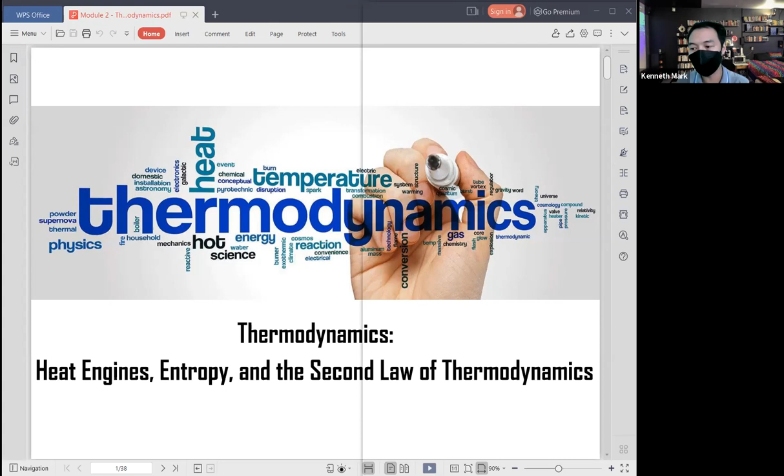Okay. So today we will be discussing the second module or second topic for this subject. So we have the thermodynamics, the heat engines, entropy, and the second law of thermodynamics.

Okay, so for the introduction, the first law of thermodynamics, which we studied, is a statement of conservation of energy. So this law states that a change in internal energy in a system can occur as a result of energy transfer by heat, by work, or by both. So only certain types of energy transformation and energy transfer processes, no? So only certain types of energy conversion and energy transfer processes actually take place in nature, however.

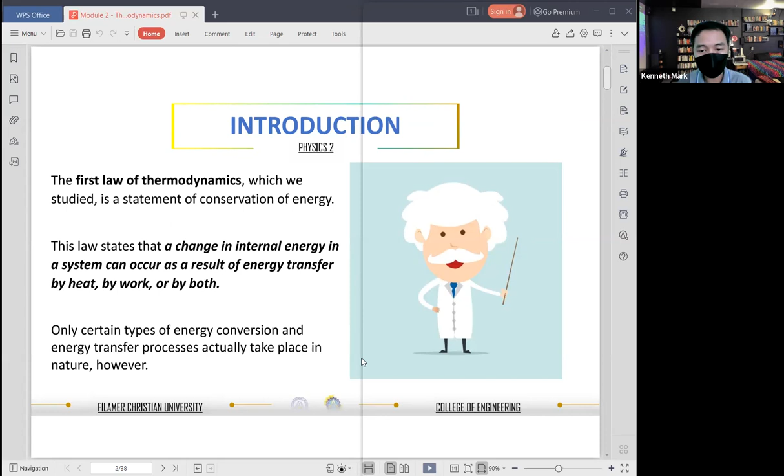So the second law of thermodynamics, which is the major topic in this module, establishes which processes do and do not occur. So we have here the following examples of processes that do not violate the first law of thermodynamics if they proceed in either direction, but are observed in reality to proceed in only one direction. So meaning hindi siya vice versa.

No? So for example, we have here, when two objects at different temperatures are placed in thermal contact with each other, the net transfer of energy by heat is always from the warmer object. Okay, so from warmer object siya to the colder object and never from the cooler to the warmer.

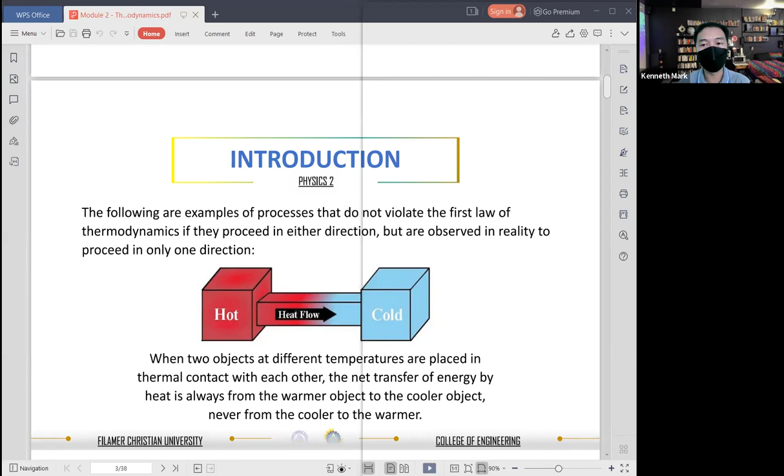Then next we have a second example, which is a rubber ball dropped to the ground. So it bounces several times and eventually comes to rest. But a ball lying on the ground never gathers internal energy from the ground and begins bouncing on its own. So wala siya ga kuha sa energy mismo.

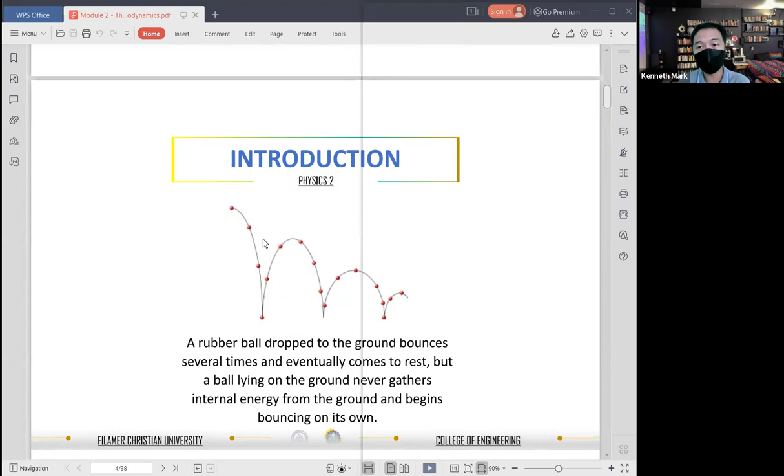So all these processes are irreversible. That is, they are processes that occur naturally in one direction only. So meaning no irreversible process has ever been observed to run backward. So if it were to do so, then it would violate the second law of thermodynamics.

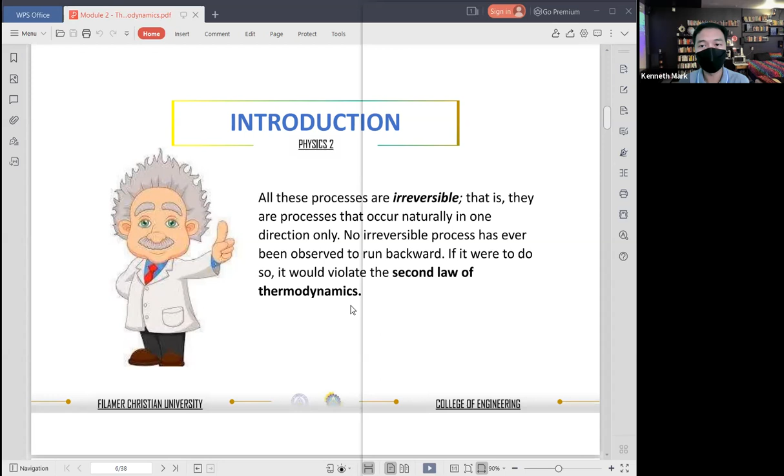Next, we have the heat engine. So a heat engine is a device that takes in energy by heat and, operating in a cyclic process, expels a fraction of that energy by means of work. Syempre. So for instance, in a typical process by which a power plant produces electricity, a fuel such as coal is burned, no?

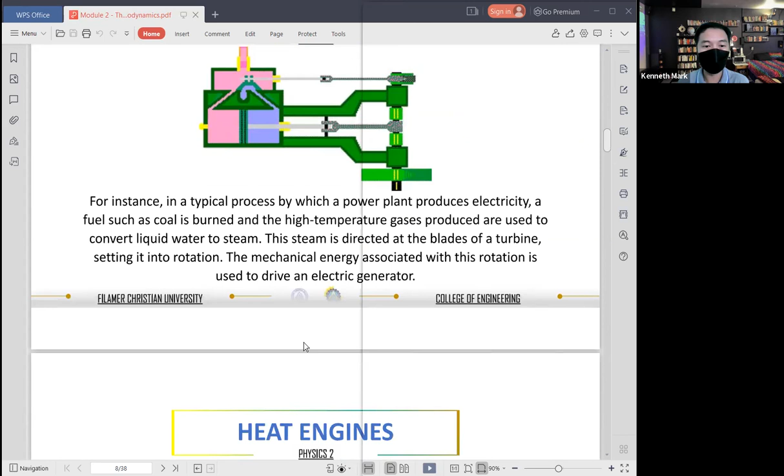Yan. So another device that can be modeled as a heat engine is the internal combustion engine in an automobile. Yan. Sa mga salakyan, ito. So this device uses energy from a burning fuel to perform work on pistons that results in the motion of the automobile. Yan.

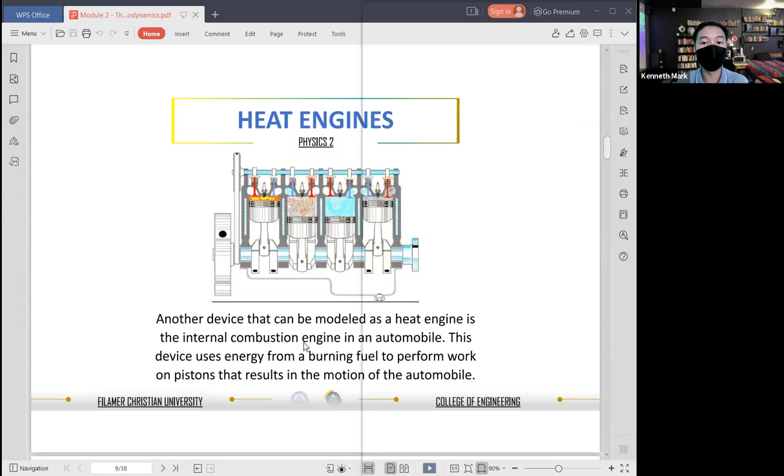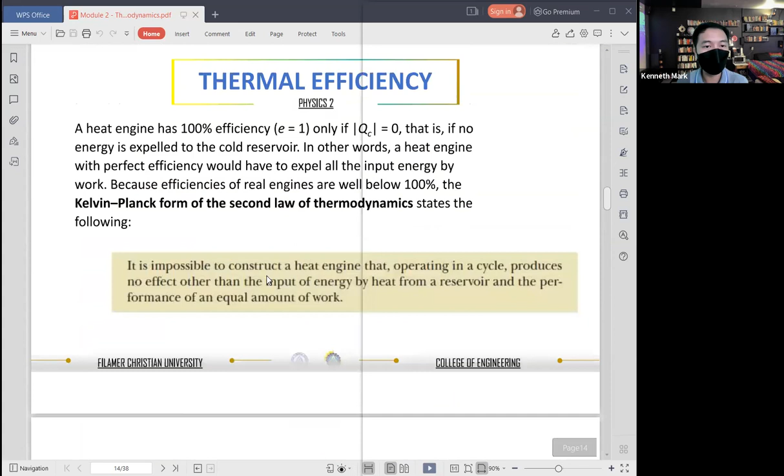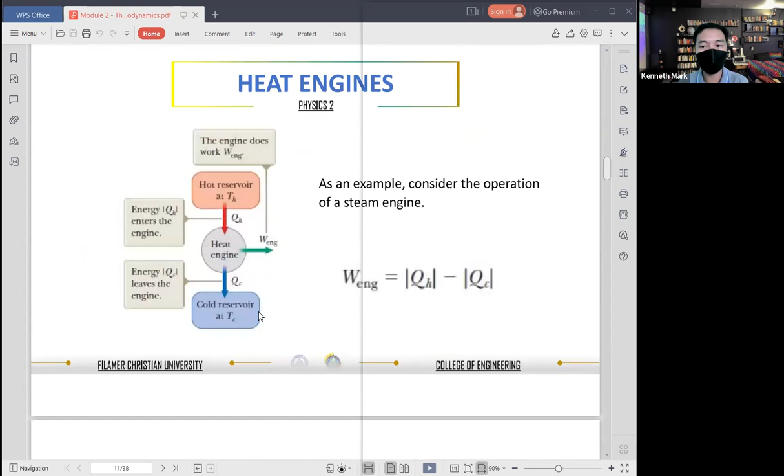Okay, so let's review that figure. Let's review this figure. So think about the energy going into the engine from the hot reservoir and splitting, with part coming out by work and part by heat into the cold reservoir, meaning there are two outputs. So in our sample problem, it involves evaluation of the quantities from the equations introduced in this section, so we categorize it as a substitution problem. And we already have the equation that we will use.

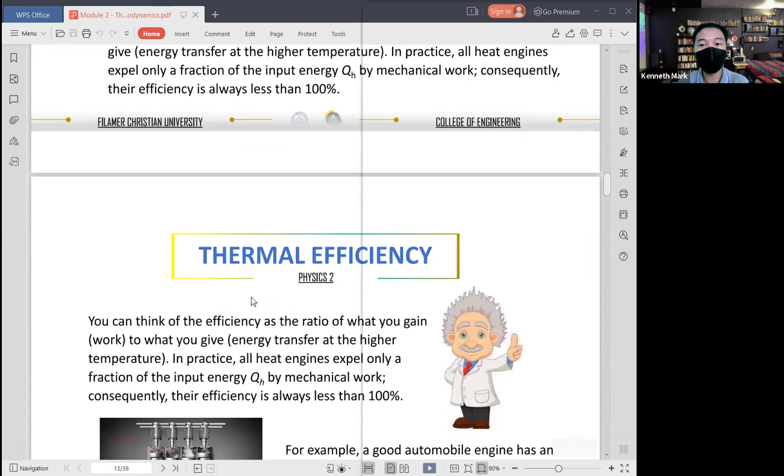Okay, so we already have the given. And that is 1 minus Q sub C over Q sub H. So our Q sub C, this is our problem. Our Q sub C is 1.5 times 10 raised to 3, this is the exhaust going to the cold reservoir. And then our heat, Q sub H, that is 2 times 10 raised to 3 joules, this is coming from the hot reservoir.

Or that is 0.25, or that is 25%. So meaning the efficiency of the engine from this problem is 25%.

Then the other problem or follow-up question would be: how much work does this engine do in one cycle? So to find the work being done by the engine, we just subtract. That is heat minus the cold, or Q sub H minus Q sub C. That is 2 times 10 raised to 3 minus 1.5 times 10 raised to 3 joules, or that is 5 times 10 raised to 2 joules. So this is the work being done by the engine. We just take the difference between the input and the output energies.

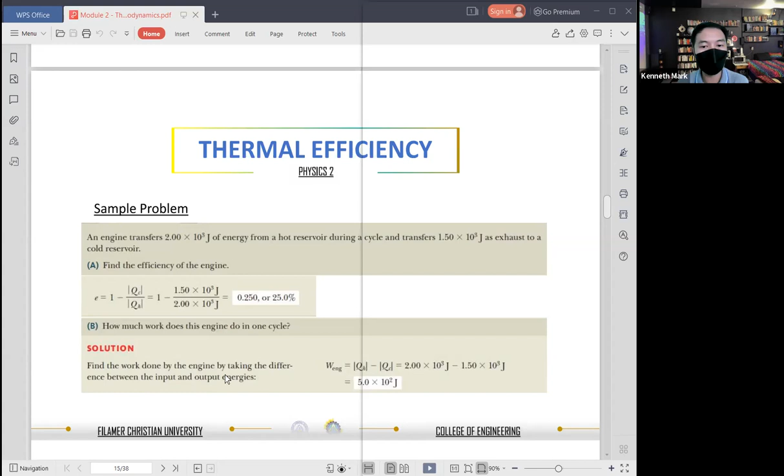So questions with regards to this problem, we can review that one later on.

So another topic, we have the heat pumps and refrigerators. In a heat engine, the direction of energy transfer is from hot reservoir to the cold reservoir. This is the heat engine, which is the natural direction, this is the correct process, this is its natural process. So the role of the heat engine is to process the energy from the hot reservoir so as to do useful work.

So what if we wanted to transfer energy from cold reservoir to hot reservoir? Because that is not the natural direction of energy transfer, we must put some energy into a device to be successful. And devices that perform these tasks are what we call heat pumps and refrigerators.

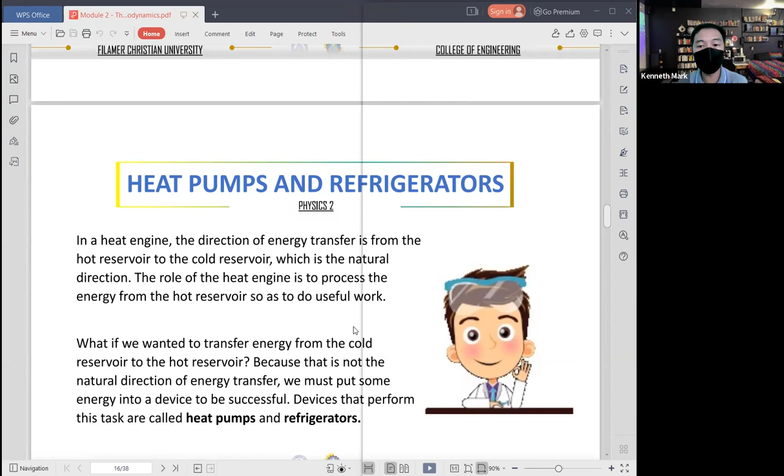So for example, homes in summer, like our houses. So what do we do here? We use, for example, an air conditioner.

So homes in summer are cooled using heat pumps called air conditioners. The air conditioner transfers energy from the cool room in the home to the warm outside. So haven't you noticed that the exposed part, the back of the air conditioner, is exposed to heat. The side of the ref, the back of our ref, is hot.

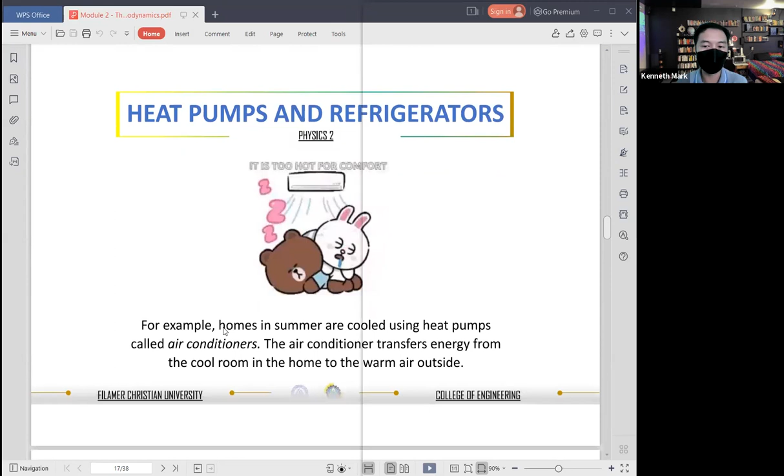So in a refrigerator or a heat pump, the engine takes in energy, that is Q sub C, from a cold reservoir, and expels energy to a hot reservoir, that is Q sub H. Which can be accomplished only if work is done on the engine. So the work is done on the engine, not work is done by the engine.

So based on the first law, the energy transferred to the hot reservoir should equal the sum of the work done and the energy taken in from the cold reservoir, because the first law of thermodynamics is conservation of energy. So therefore, the refrigerator or the heat pump transfers energy from a colder body.

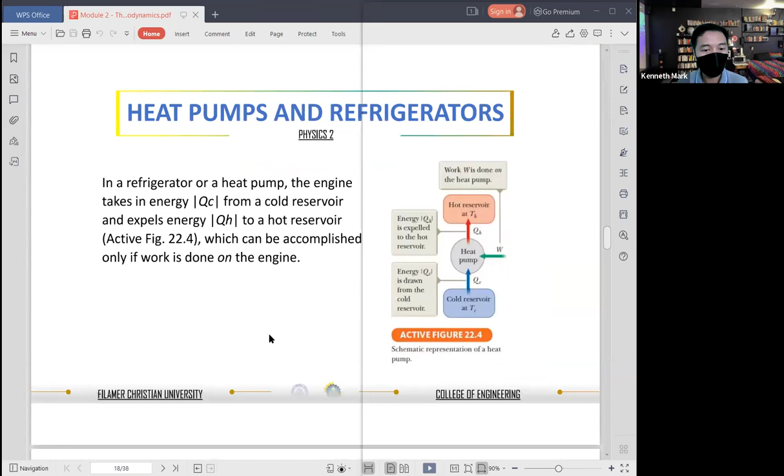So it's a colder body, for example the contents of a kitchen refrigerator, or the winter air outside a building, to a hotter body, that is the air in the kitchen or in the room in the building.

In practice, it is desirable to carry out this process with minimum work. If the process could be accomplished without doing any work, the refrigerator or heat pump would be perfect. But the existence of such a device would be in violation of the second law of thermodynamics, in the form of Clausius' statement, which states that it is impossible to construct a cyclical machine whose sole effect is to transfer energy continuously by heat from one object to another object at a higher temperature without the input of energy by work.

So in simpler terms, energy does not transfer spontaneously by heat from a cold object to a hot object.

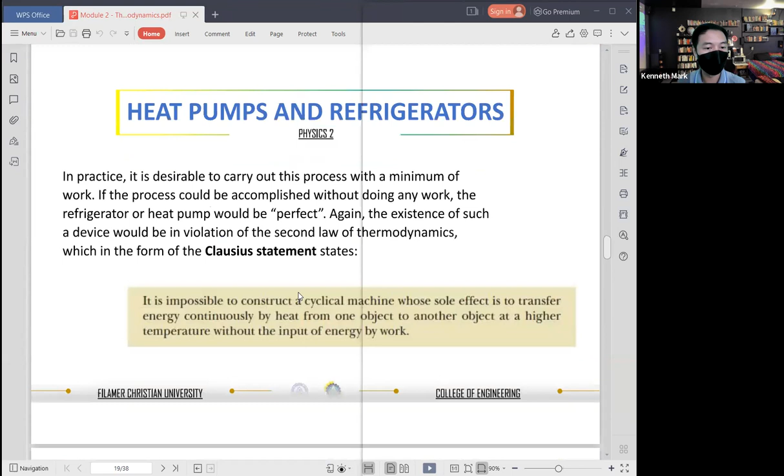Tingnan natin. Work input is required to run a refrigerator, of course.

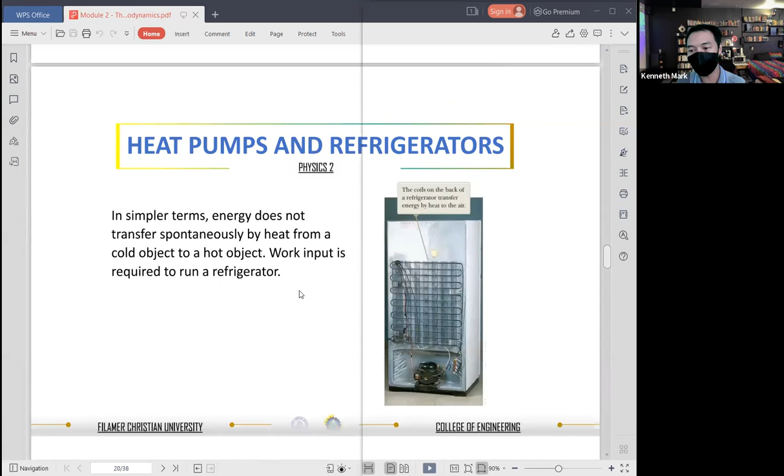Meron tayong tinatawag na the effectiveness of a heat pump. So what is this? It is described in terms of a number called the coefficient of performance. Ito yung effectiveness of a heat pump. So meron tayong COP na tinatawag.

This is similar to the thermal efficiency for the heat engine in that it is a ratio of what you gain, meaning the energy you transferred to or from a reservoir, to what you give, that is your work input. So for a heat pump operating in the cooling mode, what you gain is energy removed from the cold reservoir. So the most effective refrigerator or air conditioner is one that removes the greatest amount of energy from the cold reservoir in exchange for the least amount of work.

Ngayon meron ng mga inverter. Ito yung pinaka inverter type na refrigerator and inverter type na air conditioner, wherein mababa lang yung consume ng kuryente, mababa lang yung energy consumption niya. Pero may kamahalan nga lang sa parts. Pag nasira, parang equivalent ay parang isang bagong refrigerator, o isang equivalent niya ng piyesa na sira is parang bumili ka na rin ng bago. So take note of our formula here.

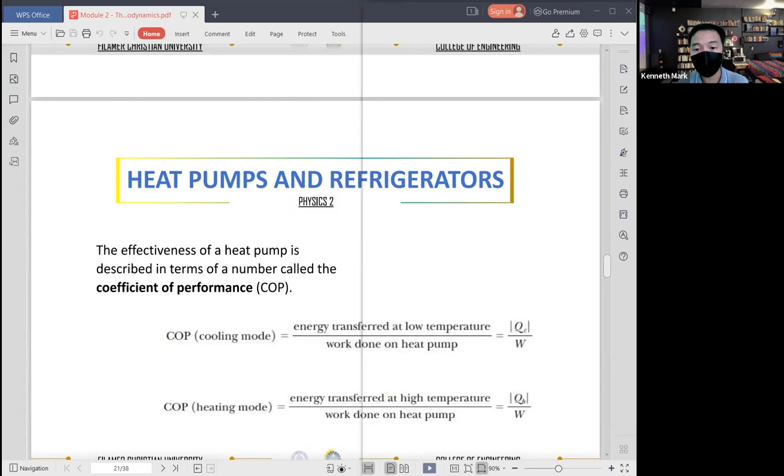Okay, so we have here some example problem. Let's take a look. A certain refrigerator has a COP of 5. So ano ba to? Heat ba to or cooling ba to? Heating ba to or cool? So when the refrigerator is running, its power input is 500 watts.

Meron tayong power na given. And a sample of water of mass, let's say 500 grams, with a temperature of 20 degrees Celsius, is placed in the freezer compartment. So tanong dito is, how long does it take to freeze the water to ice, to 0 degrees Celsius? Ilang oras ba bago maging ice o bago maging yelo yung tubig? Assume all other parts of the refrigerator stays at the same temperature and there is no leakage of energy from the exterior, meaning wala tayong singaw. So the operations of the refrigerator results only in energy being extracted from the water.

Tingnan natin. Tingnan natin anong nangyari. So we use the equation to relate the work, that is W being done on the heat pump, to the energy, that is Q sub C.

Ito yung papuntang cold, or that is the energy extracted from the water. So that is your change in time would be equal to Q sub C over the...

That is Q sub C, that must be extracted from the water of a mass. So we have...

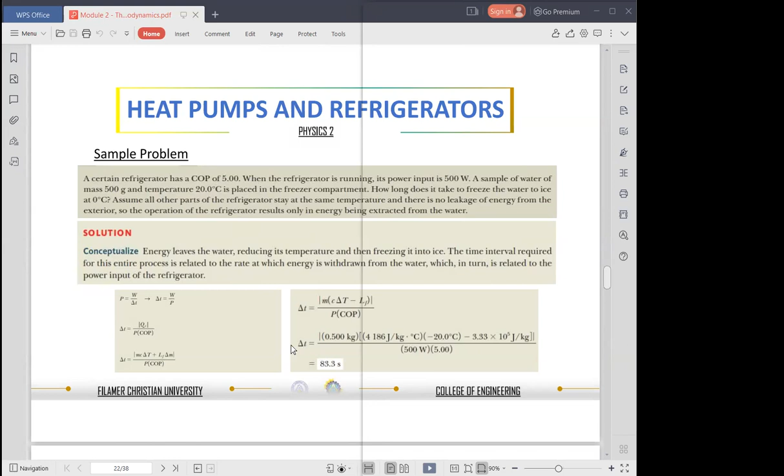About the answer, degrees. So that is your... 0.5 kilograms times ano yan? Times 4,186 joules per kilogram. Ano to? Ito yung C natin, or that is the specific heat of water. Check niyo na lang sa previous module natin.

And you have your change in temperature, that is 0 minus 20 degrees Celsius, or negative 20 degrees Celsius. Then subtract natin lahat sa 3.33 times 10 raised to 5. Ano tong 3.33 times 10 raised to 5? Saan to galing? Ito yung latent heat of fusion ng ano natin, yung ng water natin. Then all over by, of course, your power that is given, 500 watts, then multiplied by your COP, that is 5. So therefore, it can turn to ice by 83.3 seconds.

Okay. So the time interval for the water to freeze in a refrigerator is much longer than 83.3 seconds, which suggests that the assumptions of our model are not valid. So meaning only a small part of the energy extracted from the refrigerator interior in a given time interval comes from the water. That is, energy must also be extracted from the container in which the water is placed. Of course, syempre naggamit ka sang imong suludlan sa imong tubig, so i-compute pa na siya.

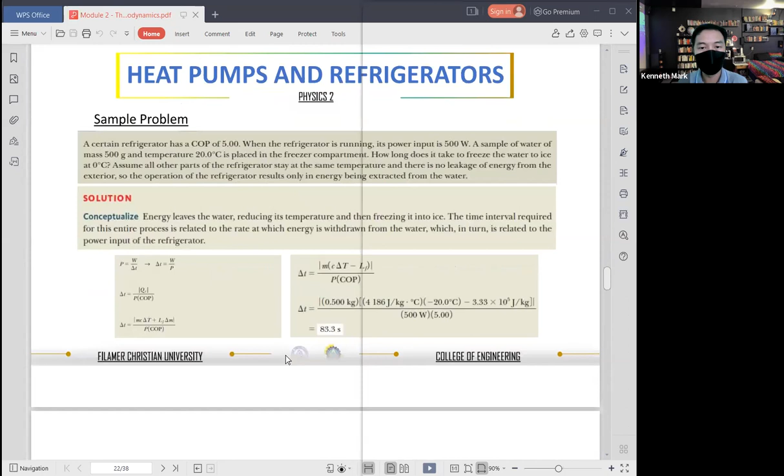Next, so we have the reversible and the irreversible process. Okay? Ito yung second law of thermodynamics, yung irreversible, di ba? So in a reversible process, the system undergoing the process can be returned to its initial condition. Tama ba? Is an equilibrium. So it's what we call irreversible. Okay, yun yung mga natural processes.

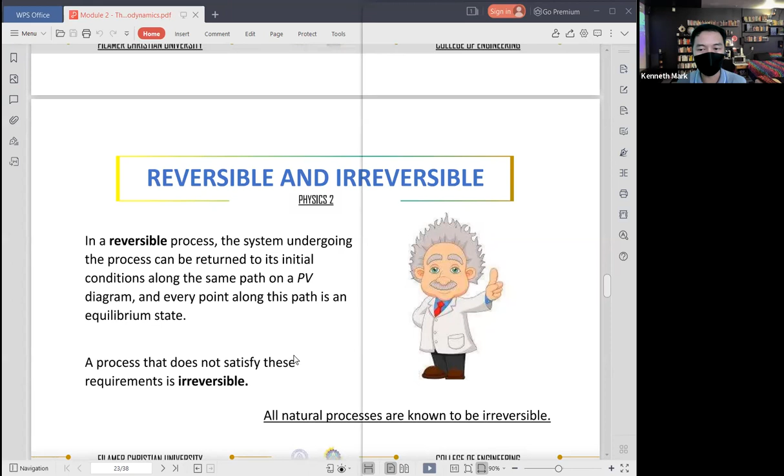So when the membrane is punctured, the gas expands freely into the vacuum, syempre. As a result of the puncture, the system has changed because it occupies a greater volume after the expansion. And because the gas does not exert a force through a displacement, wala tayong force dyan, it does no work on the surroundings as it expands. And then in addition, there's no energy.

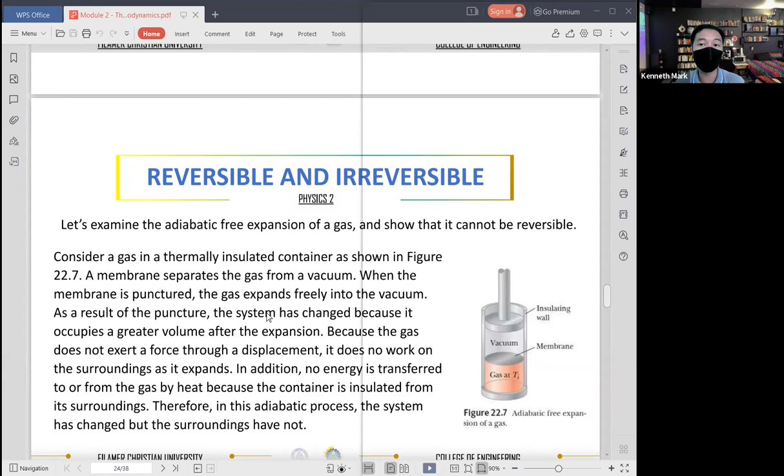Ay, na-late na pala.

Tama. So although all real processes are irreversible, some are almost reversible. Pwede naman, nasa first law of thermodynamics sila. So the process can be approximated as being reversible. So how? Suppose a gas is compressed isothermally in a piston-cylinder arrangement, and the gas is in constant.

Okay. Meron ba dyan? Example. Wala tayong example. Sige, natin to.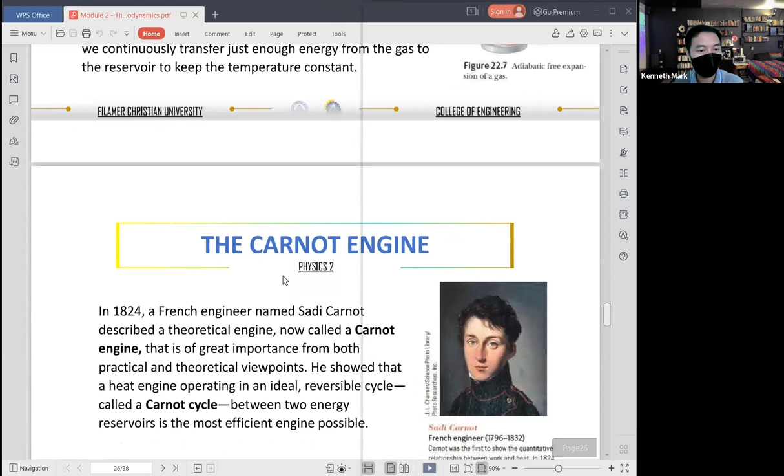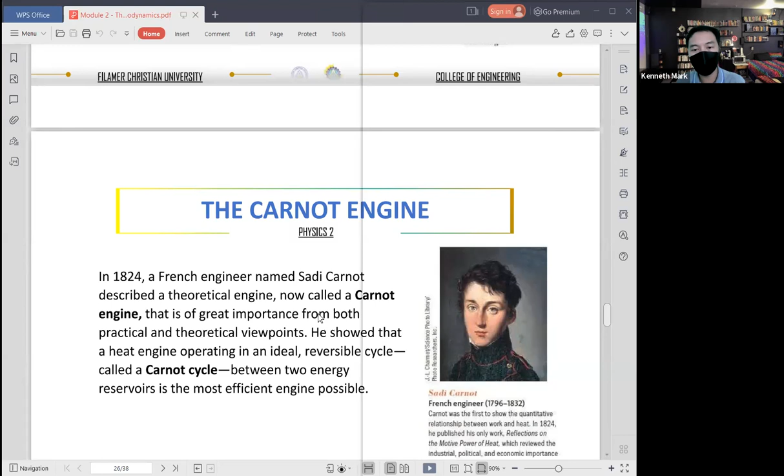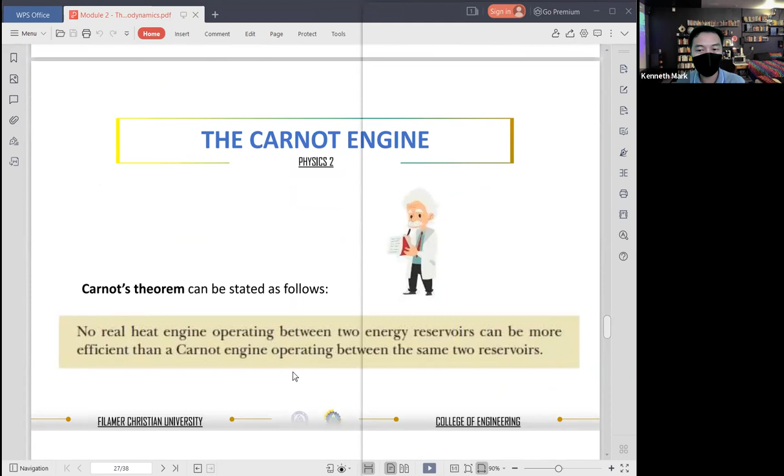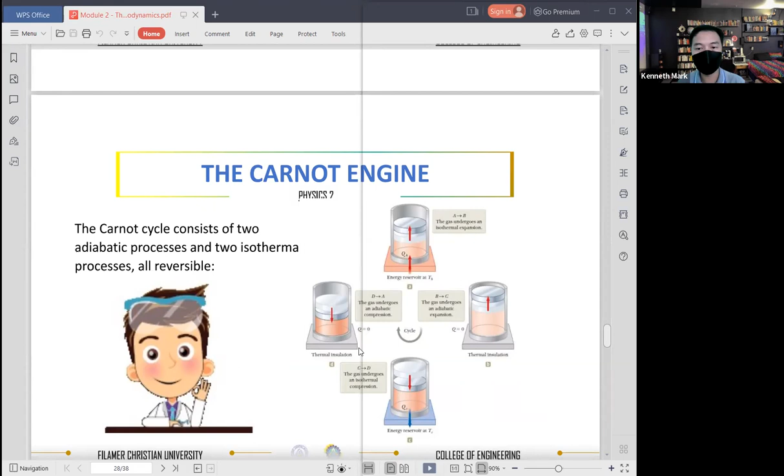So the Carnot cycle consists of two adiabatic processes and two isothermal processes, all reversible. So pwede siya baliskad-baliskad, no? So tingnan natin yung process A. Medyo blurred lang siya. Okay, so sa process A, nandyan.

So let's say from A to B. So ito yung letter A natin. Let's say we have a process A to B. So the picture is an isothermal expansion at temperature T sub h. So what happens? Expansion.

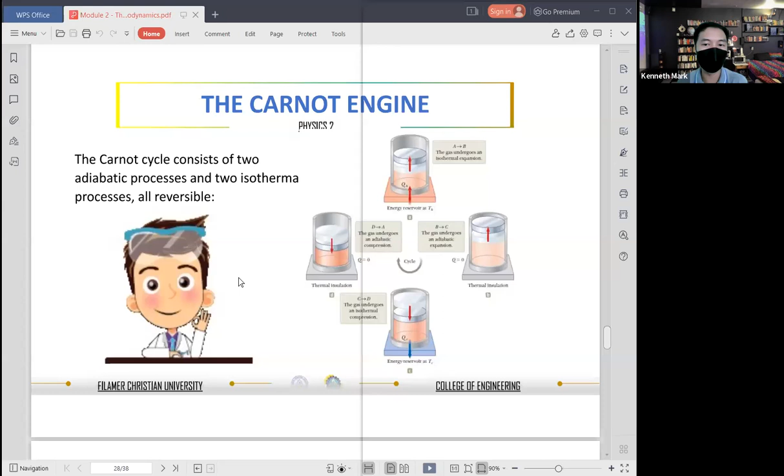Reversible. Okay. So pwedeng pagbabalik na rin. So hindi naka-include yung example. Sige na lang. So let's proceed sa gasoline and diesel. Okay. Ayan. I think we have 10 minutes pa. Okay. So we will end by 5.

So gasoline and diesel engines. Ayan. So in gasoline engine, we have 6 processes. Okay, so 6, unlike sa Carnot, 4 lang. So dito sa gasoline and diesel engines, 6. So ano na to? Ano yung mga to? So nakita niyo yung figure, that is active figure 22.11. Okay. So here we will consider the interior of the cylinder above the piston to be the system that is taken through repeated cycles in the engine's operation.

And so for a given cycle, yung piston, pataas siya. Okay? So the piston moves up and down twice. So pataas then pababa. That is twice, which represents a 4-stroke cycle. Okay? So meaning it consists of 2 upstrokes and 2 downstrokes. So 4 lahat. So the process in the cycle can be approximated by what we call the Otto cycle. Okay? That is O-T-T-O cycle. Yan.